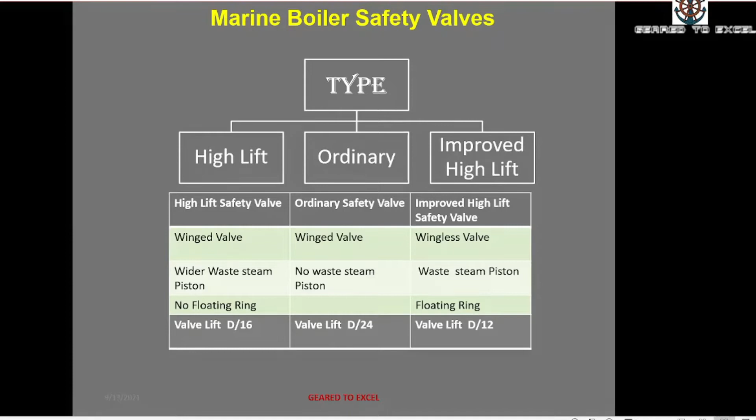Ordinary marine safety valves: when the boiler pressure reaches 3% more than the working pressure, the safety valve lifts. In the ordinary safety valve, the lift is minimum due to the valve lift being D/24 - it has very minimum valve lift due to its characteristics. Hence, the excess pressure build up inside the boiler cannot be released quickly.

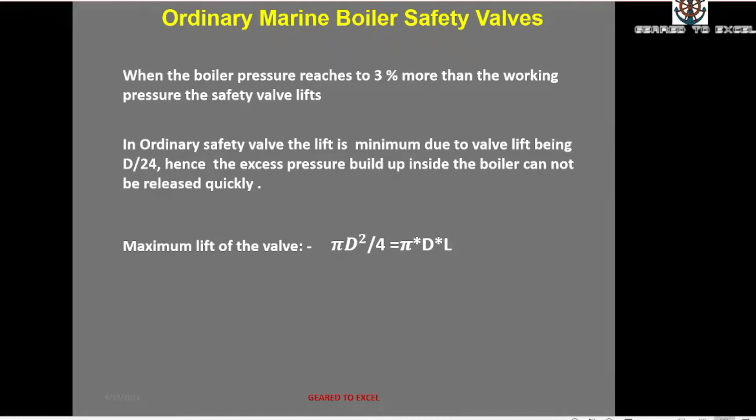The maximum lift of the valve is as per this formula: pi d square by 4 is equal to pi into d into L. Hence, the valve lift L is equal to D/4.

Regulations for boiler safety valve - what are the regulations for boiler safety valves? Number 1: each auxiliary boiler, including EGB, is required to be fitted with at least one safety valve, and when the water heating surface area is more than 46.5 square meters, 2 or more safety valves are to be provided.

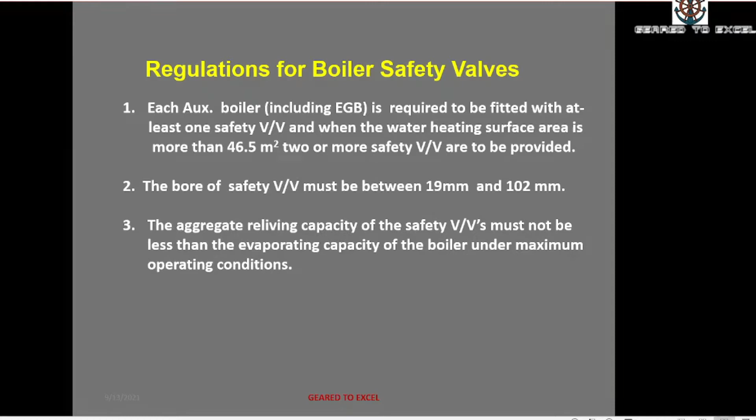Number 2: the bore of the safety valve must be between 19 mm and 102 mm. Number 3: the aggregate relieving capacity of the safety valves must not be less than the evaporating capacity of the boiler under maximum operating condition.

Understood? It should not be less than the evaporating capacity of any boiler.

Fourth one: accumulation pressure test. When the steam stop valve is fully shut and the boiler burner is firing continuously at full load capacity, the maximum pressure build up in the boiler should not exceed 6% of the maximum allowable working pressure.

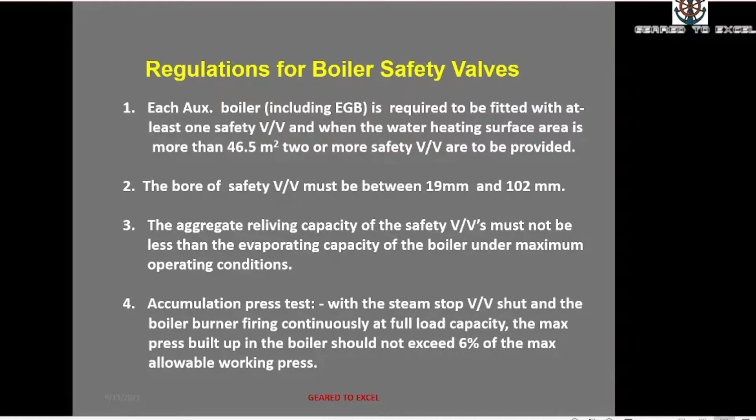Fifth, during this period, feed water can only be admitted for safety reasons. In this condition, all valves are shut, everything is shut. If there is any safety reason, that time you can open the feed water; otherwise nothing is allowed.

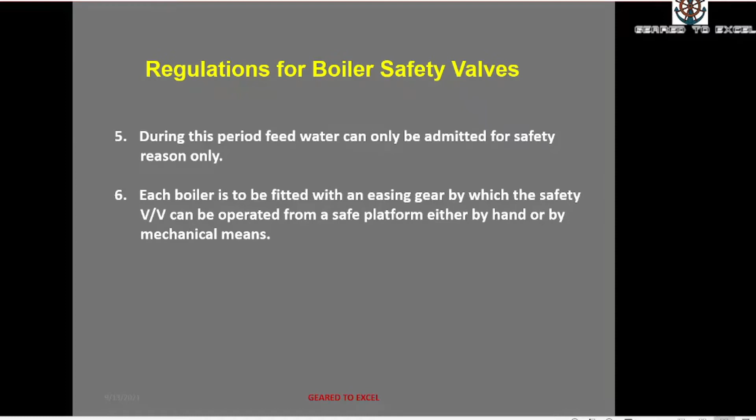Each boiler is to be fitted with an easing gear by which the safety valve can be operated from a safe platform either by hand or by mechanical means.

Seventh, the area of the escape pipe has to be equal or greater than the combined outlet area of the two safety valves, and the pipe should be free of any restrictions.

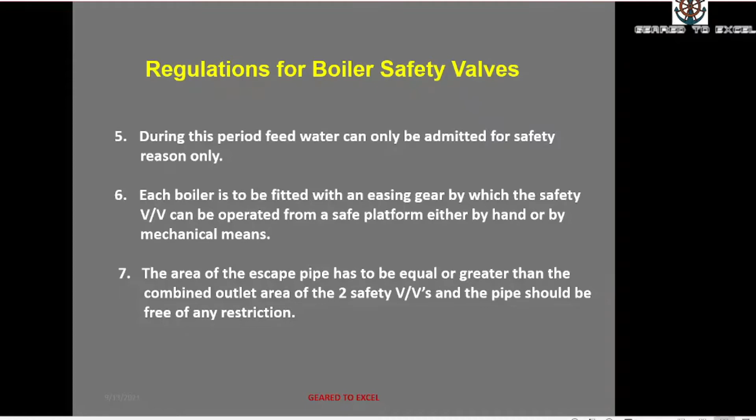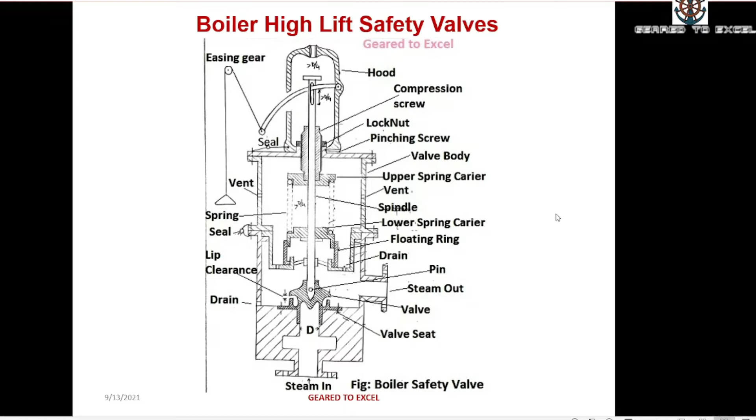Let's go to the boiler high lift safety valve lifting principle. This is just an exploded view of that drawing.

This is the valve and valve seat. This is the lower spring, and this one is the floating ring, which acts as a liner for the waste steam piston.

The explanation is in the next slide. First go through this drawing properly, and then I'll explain.

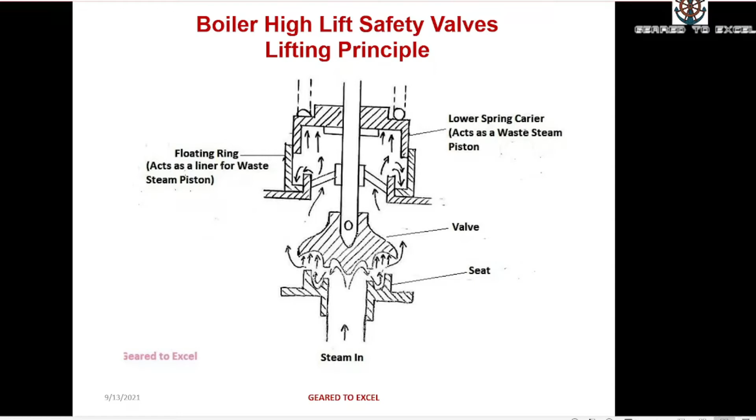Steam acts underneath the valve and lifts it against spring pressure. Simmering starts, and steam fills up the annular space of the valve seat after being deflected by the special design of the valve.

Some of the steam leaks from the lip clearance, but steam pressure also builds up in the annular space and applies more force on the valve lip. Now both pressures work together to lift the valve more, which is called pop-up action. These pressures join together and lift the valve further, known as pop-up action: pressure acting underneath the valve and pressure acting on the valve lip.

Now the steam pressure fills up under the lower spring carrier and pushes it up, while it acts on the floating ring to be held down in position, which acts as a cylinder for the lower spring carrier. This floating ring is held down and acts as a cylinder for the lower spring carrier.

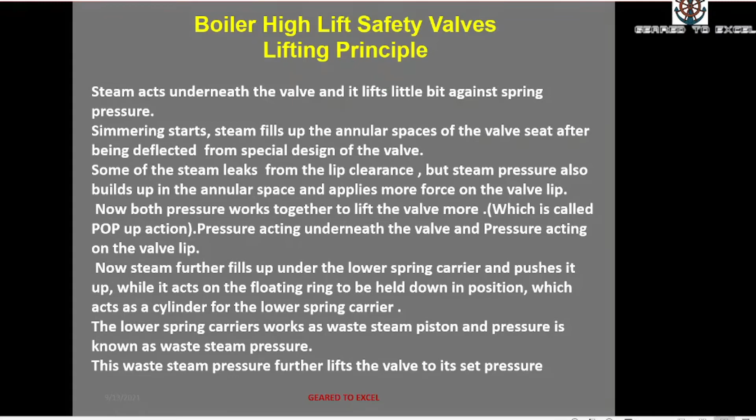The lower spring carrier works as a waste steam piston, and the pressure is known as waste steam pressure. This waste steam pressure further lifts the valve to its set pressure. So wherever the valve setting pressure is, at that time this piston — the waste steam pressure — will lift the valve to the set pressure.

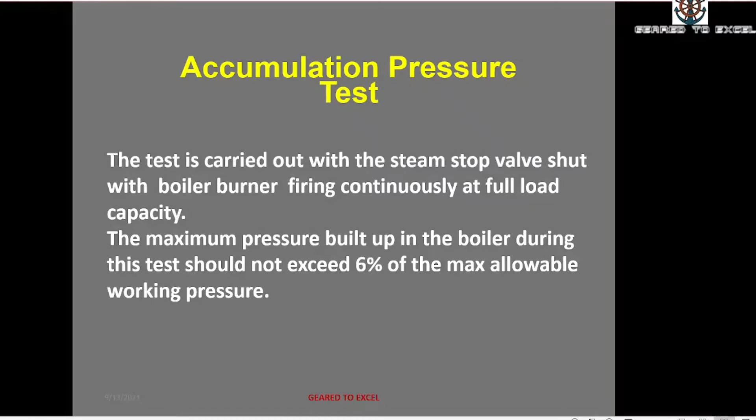Accumulation pressure test. Why is it carried out? The test is carried out with the steam stop valve shut, with the boiler burner firing continuously at full load capacity. The maximum pressure build up in the boiler during this test should not exceed 6% of the maximum allowable working pressure of the boiler.

Safety valve blow down and its significance. Blow down is the difference between set pressure and reseating pressure of a safety valve, expressed as a percentage of set pressure, and is governed by the setting of the ring above the valve seat.

Lowering the ring will reduce blow down. Setting up the ring will increase the blow down. What is the significance of doing all this?

Too little blow down: if the valve blow down is too little, it will chatter, opening and closing repeatedly, which may lead to mechanical damage to the safety valve seat and other parts as well. So if there is too little blow down, chattering of the safety valve and unstable relief operation will occur.

And the other way, too much blow down is not economical — it causes loss of water, loss of chemical, steam energy, and ultimately fuel.

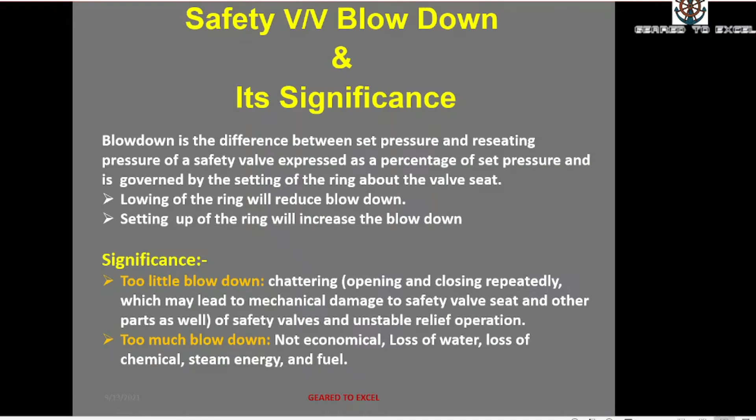So let's come to safety valve inspection. What all do we have to inspect on the safety valves? Valve and valve seat: visual checks for scoring, hairline cracks, and mating surface check.

For this we use Prussian blue. We demand this in our engine store — there is a tube of Prussian blue. You can use it to check the mating surface.

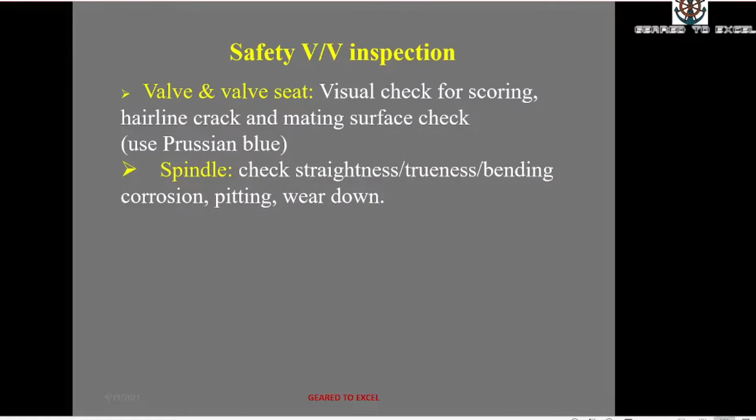Spindle: check straightness, trueness, bending, corrosion, pitting, and wear down. Straightness you can check, and trueness you can check by hanging it and making a true sound.

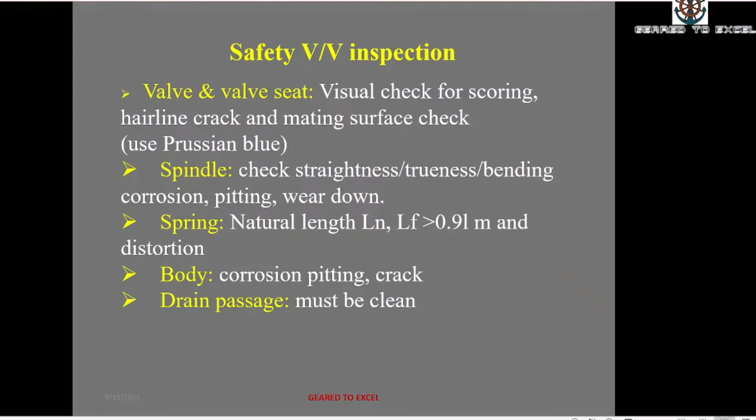Body: you have to check the valve body for corrosion, pitting, or cracks. Drain passages must be clear and must be clean.

Easing gear: you check the wire condition, condition of pulleys, no obstructions, properly greased, easy to move, and properly eased up.

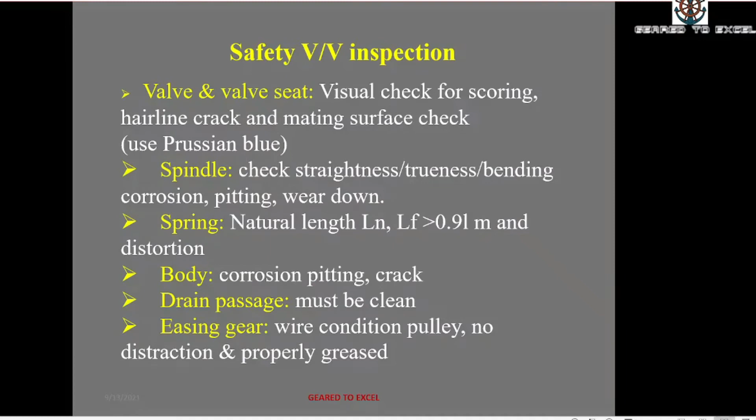Let's go to setting of the safety valve. How do we set the safety valve? First thing: when are safety valves reset, and what is the procedure to reset them?

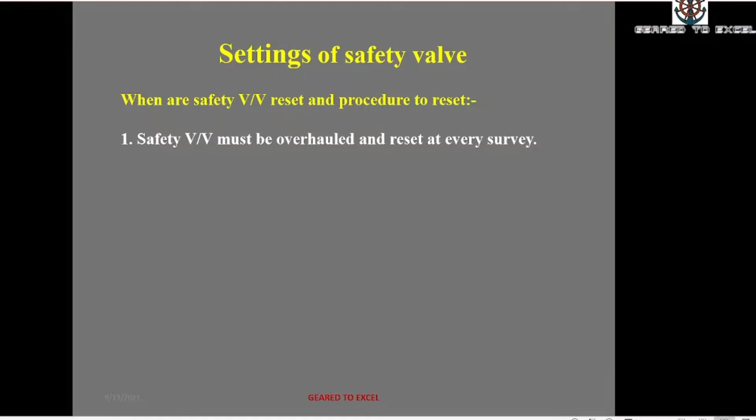Number 1: safety valve must be overhauled and reset at every survey. Secondly, ensure at least 2 pressure gauges are available — you should have at least 2 pressure gauges while setting a boiler safety valve.

Screw down the compression screw on both valves a few turns more than the previous setting — slightly screw down. Whatever the setting was, you unlock the locking nut and then screw it down slightly more than the previous setting.

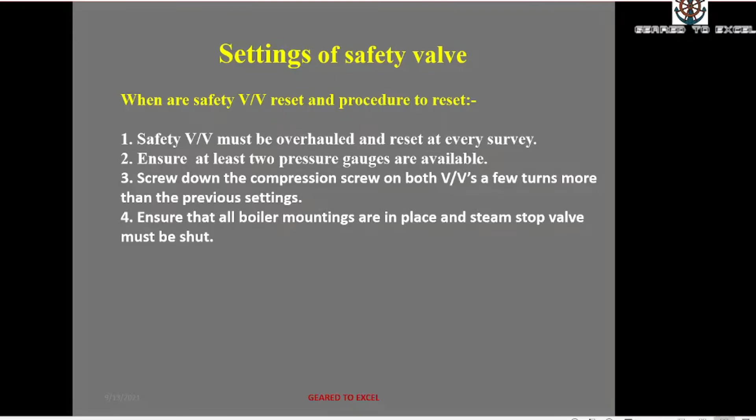Fourth one: ensure that all boiler mountings are in place and the steam stop valve must be shut. Follow the instructions for firing the boiler from cold condition.

After the boiler burner has cut out automatically, change burner firing to manual mode. Fire the boiler manually until the required safety valve pressure setting is reached. Be careful — slacken the compression screw of one valve until this valve blows.

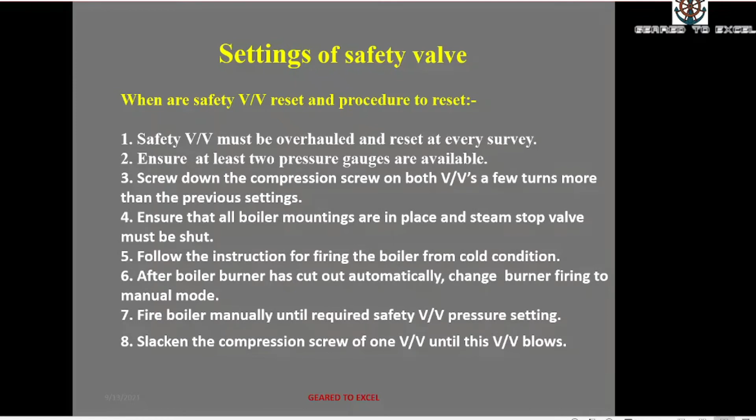Manually fire the boiler continuously to check if this valve opens at set pressure. Stop firing, then check that this valve closes firmly without any leakage.

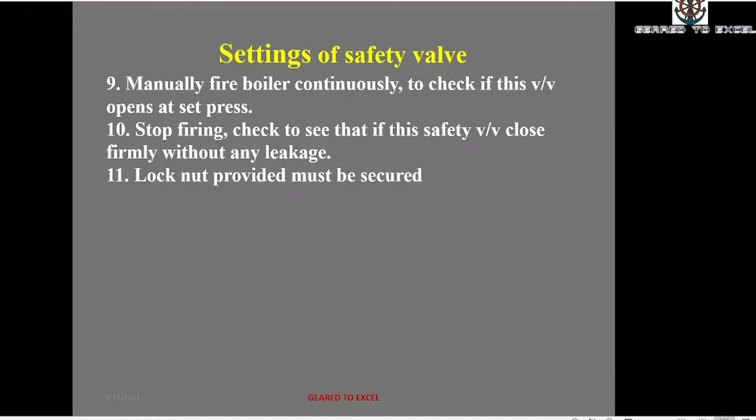If the setting is done, the lock nut provided must be secured. Now this safety valve that has been adjusted must be gagged. Use the gagging tool and gag the safety valve.

The other safety valve must now be adjusted in the same manner as the first valve. But this valve is usually set about 3% higher than the earlier one. So if you have set that one, this one should be set 3% higher than that setting.

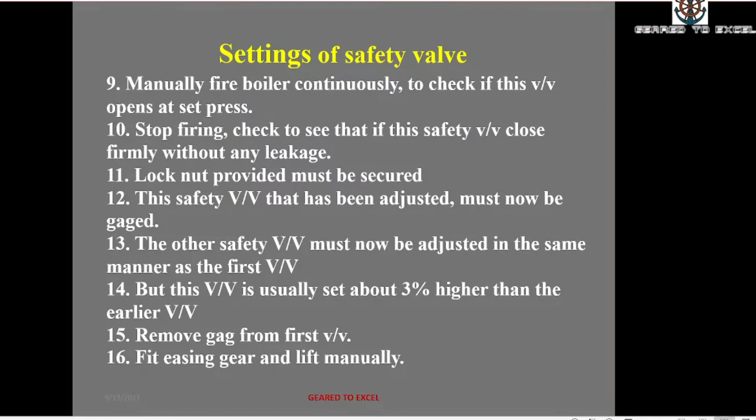Finally, remove the gag from the first valve. Fit the easing gear and lift manually to check the operation of the safety valves.

Likely causes of safety valve leak: the valve seat getting corroded, chattering or fluttering may have taken place, or impurities like dirt and foreign particles getting trapped between the valve and the valve seat might cause leakage. The spindle and valve must be secured against turning to protect the valve and seat from damage.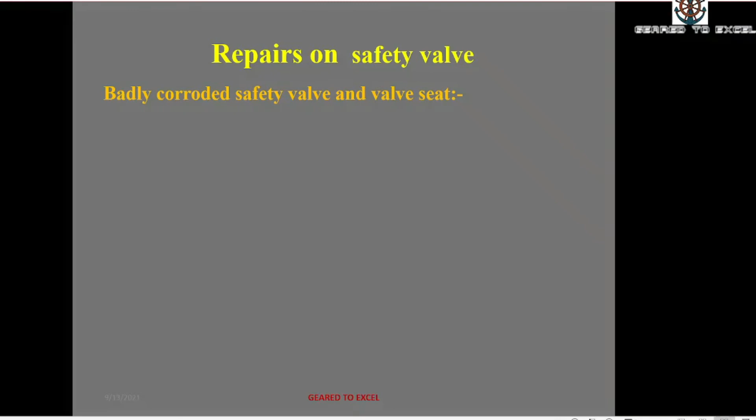So, repairs on safety valves. Badly corroded safety valve and valve seat - what repair do we do?

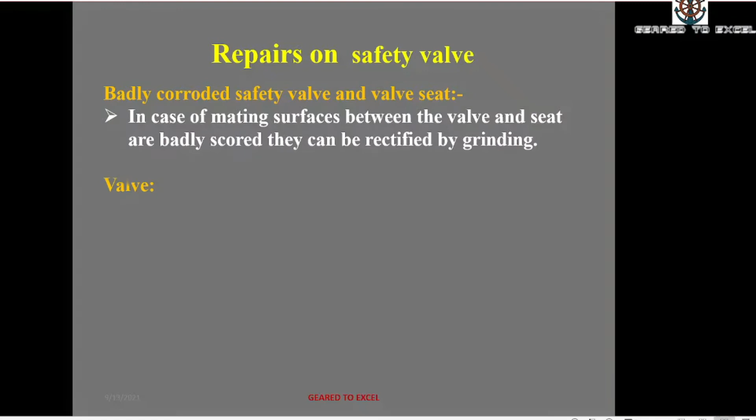In case the mating surfaces between the valve and the seat are badly scored, they can be rectified by grinding. The valve can be ground against a cast iron plate using a fine grinding Carborundum paste stirred with kerosene.

Slightly use the kerosene for cutting purpose, it will cut the seat easily.

The seat in the valve body can be ground in the same way using a cast iron rod of suitable size, using Carborundum paste and kerosene.

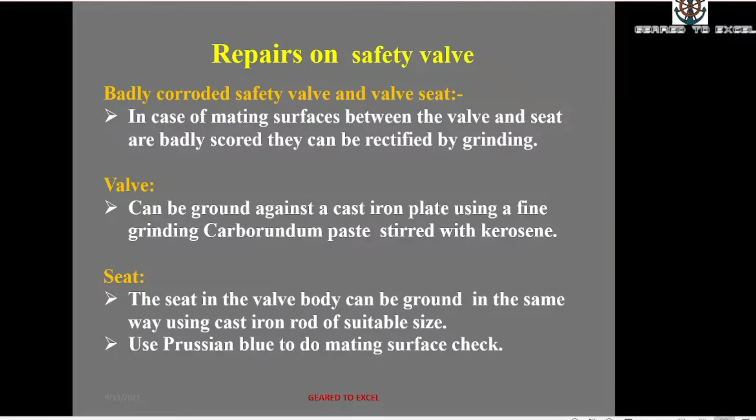Finally, use Prussian blue on the mating surface to check that the valve has been ground properly, and it is overhauled and repaired.

Effect due to change in clearance: increased valve lift - what can it affect? What all effects are there? It causes increased blow down. If your valve lift is increased, it will increase blow down.

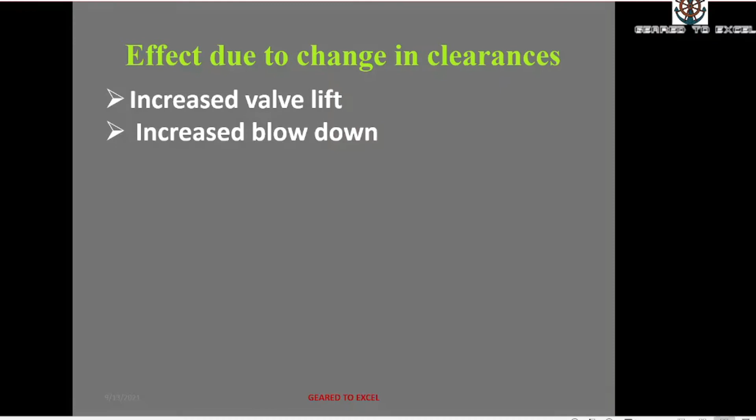If necessary, the following needs to be done: you can counteract this. The remedy is to adjust the maximum lift.

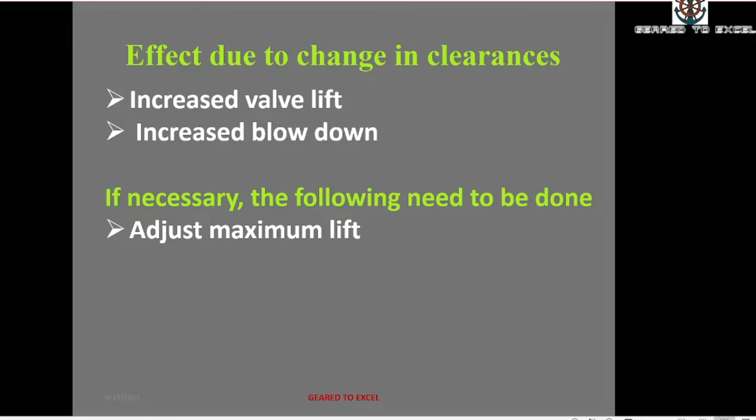The surveyor may request to carry out an accumulation pressure test.

Routine checks on safety valves for proper operation - what all routine checks are supposed to be done for a safety valve for its proper operation?

Check for any water or steam seepage from the drain pipe fitted to the safety valve. Check the escape pipe - it should not be hot due to steam leakage. You can use an IR thermometer for that.

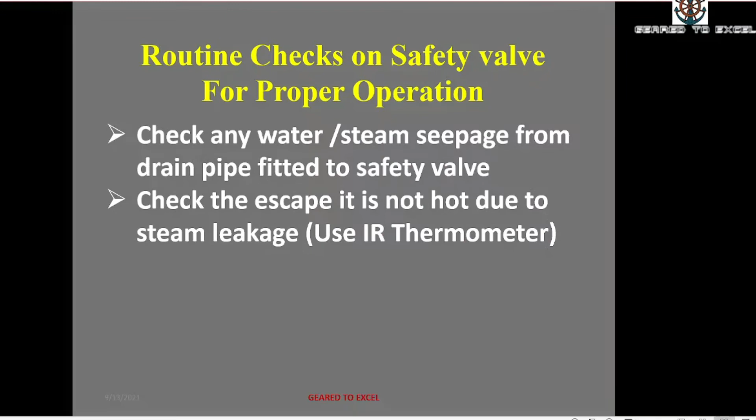Check at the funnel for signs of steam emission or leakage, you can see there. If there is leakage, manually operate the easing gear.

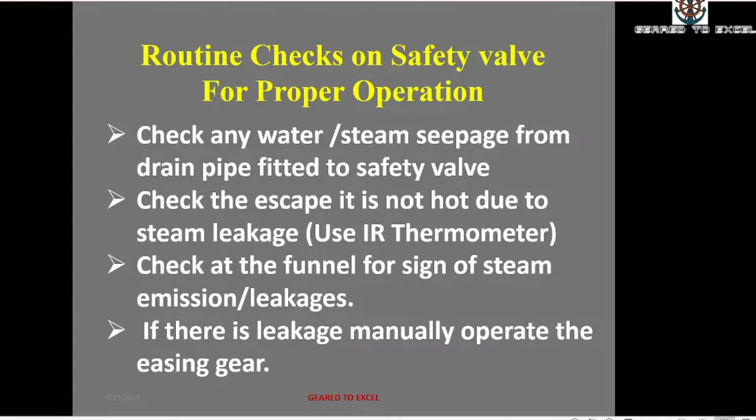Safety valve set pressure is the pressure at which safety valves begin to lift.

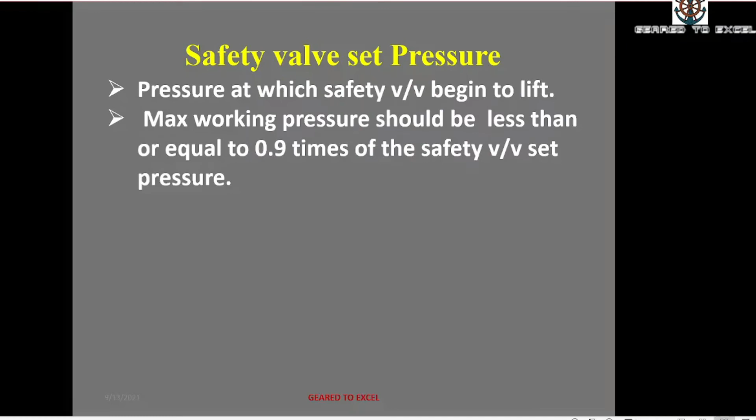Maximum working pressure should be less than or equal to 0.9 times the safety valve set pressure. The safety valve is not to be set more than the maximum allowable pressure.

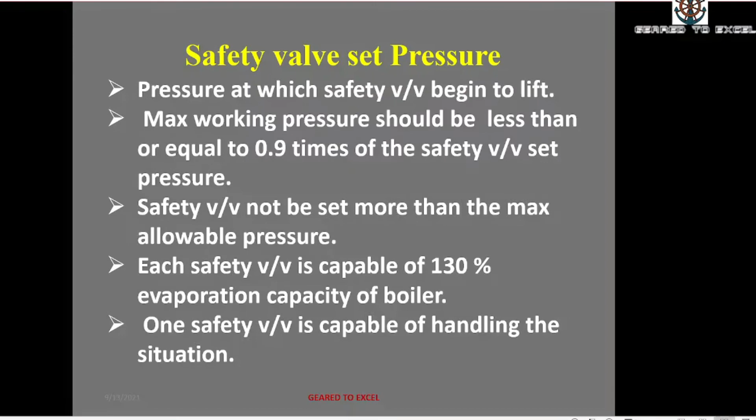Each safety valve is capable of 130% evaporation capacity of the boiler. One safety valve alone is capable of handling the situation. Understood?

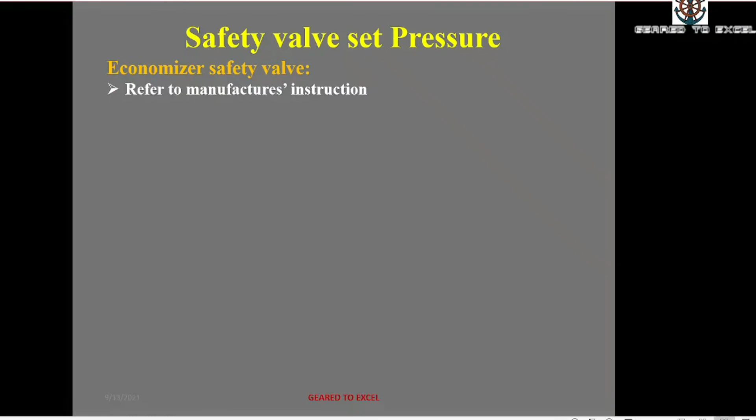Safety valve set pressure for the economizer safety valve: refer to manufacturer's instructions because it differs from boiler to boiler, but usually it is higher than the maximum boiler water circulating pump pressure, as a thumb rule.

Superheater safety valve setting: minus 0.34 bar of the boiler drum safety valve setting. The superheater safety valve should be set at minus 0.3 to 0.4 bar of the boiler drum safety valve setting.

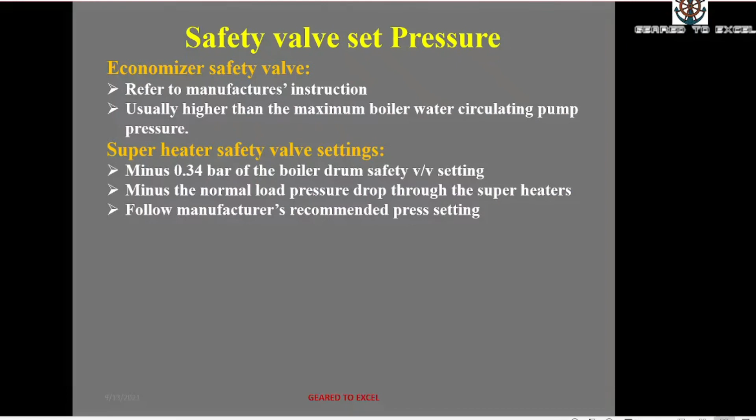Minus the normal load pressure drop through the superheater. Follow the manufacturer's recommended pressure setting because again it will differ from boiler to boiler and manufacturer, so it is always better to go as per the manufacturer's recommendations.

Location is usually on the outlet pipe to prevent overheating of the tube in case of relieving. If the boiler safety valve blows, there will be a starvation of steam - that's why the superheater setting is less than the boiler safety valve setting.

Safety valves are to be checked for their setting. If steam cannot be raised in port, the chief engineer is responsible to set the safety valve at sea and record the setting pressure in the logbook.